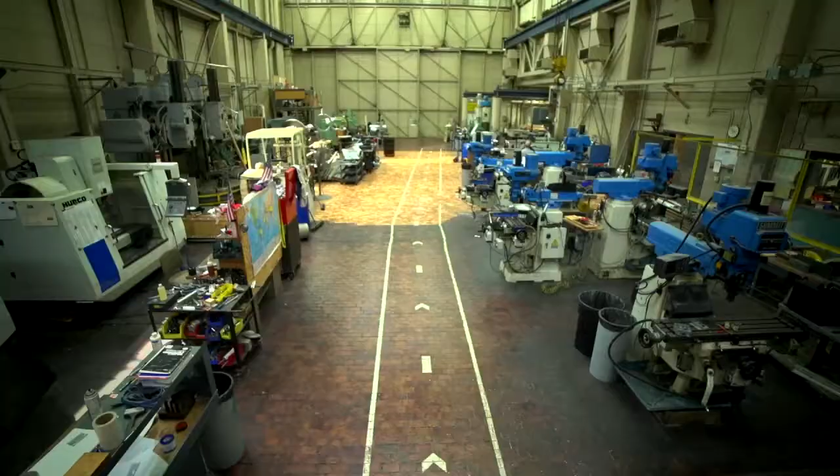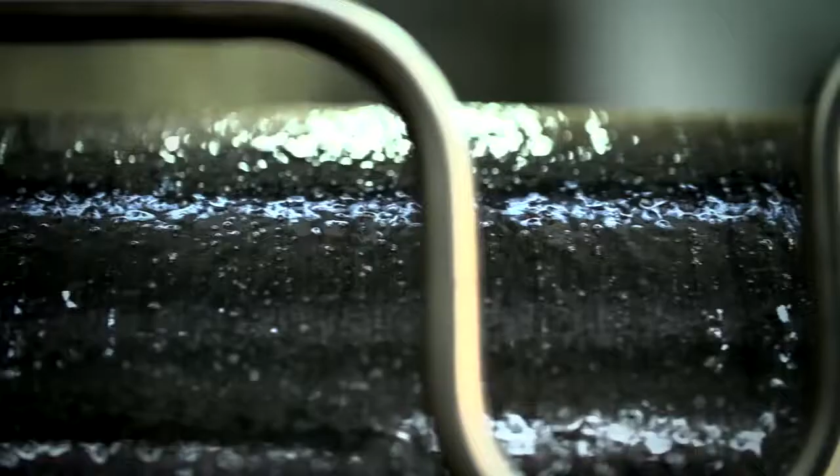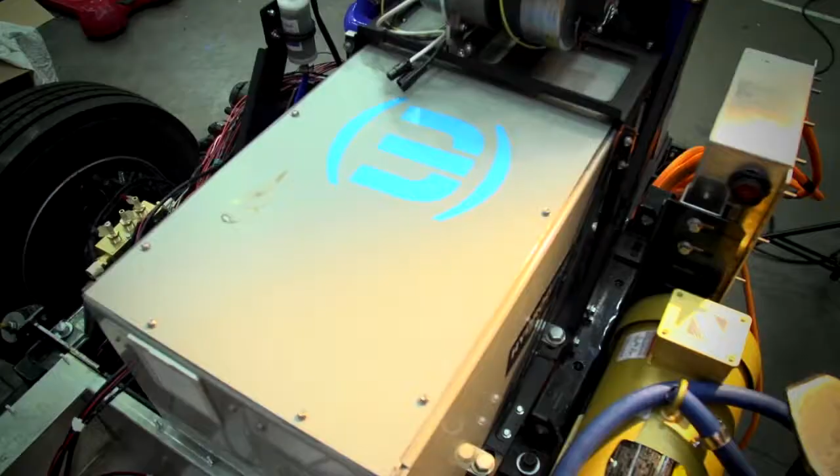On this episode of Game Changers, we will introduce you to the Center for Electromechanics. The CEM is utilizing an investment from the Department of Energy to develop a zero-emission fuel cell hybrid electric vehicle. Through a partnership with UPS, the CEM has been chosen to lead the vehicle design and its build through phase 1 of the project. Once complete, the CEM's prototype will lead the way for 16 additional delivery vans to be retrofit with fuel cell hybrid powertrains, which will be tested at distribution facilities across California.

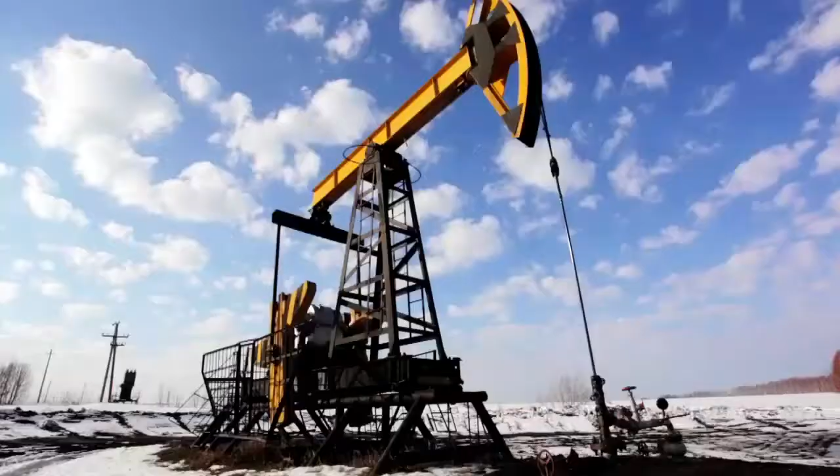We need to wean ourselves from our dependence upon fossil fuels. You just look at your highways, you spew polluting gases. They're causing global warming, they're choking the people in the major cities of the world, and they're not sustainable over the long term. Not only that, but there are a lot of hidden costs with fossil fuels and with the oil that goes to run your car in an internal combustion engine.

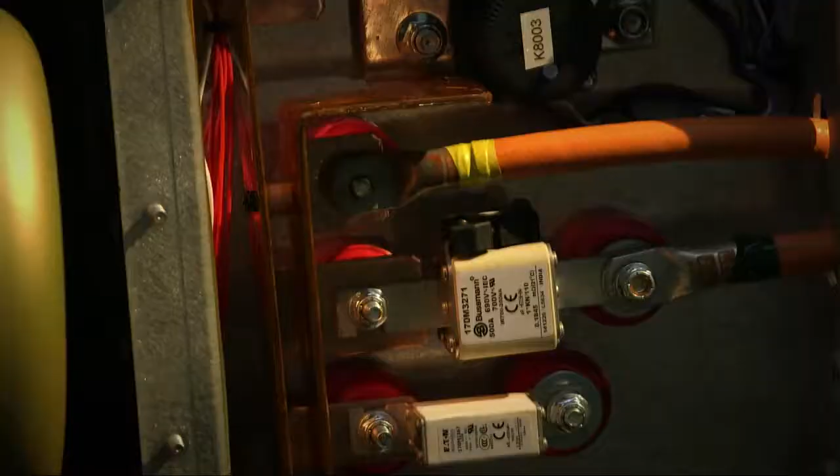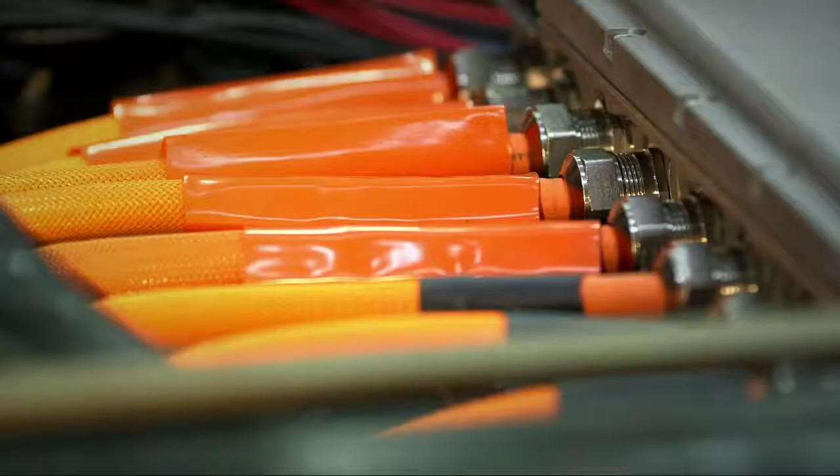We have been working for probably a decade trying to understand how to electrify transportation. We've looked at technologies basically to improve batteries, to improve the vehicles, and now this project, which we're really excited about, is to use hydrogen to augment the battery power.

Think about 2012, the Department of Energy put out a solicitation looking for zero emissions cargo and freight transportation equipment. Think medium-duty size vehicles, class 4 to 7 vehicles. Looking for zero-emission alternatives for those that would extend the range over existing versions of zero-emission vehicles, so that they could complete longer duty cycles and have more commercial viability for the fleet operators.

You get the range that you can get in a typical gasoline-powered vehicle. We can fill it as quickly as you can a typical gasoline-powered vehicle, and we get tremendous performance with no pollution.

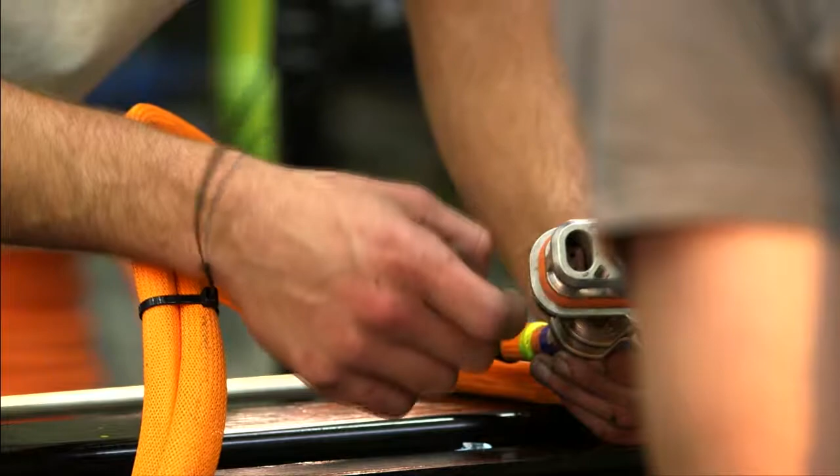Well, funding for the project has actually come from the federal government, the Department of Energy, and from the state of California. And in addition to that, United Parcel Service has worked with us, UPS has worked with us to provide the problem and to provide the constraints. How can the technology actually be used for a company who's in a competitive market trying to make money?

The way to do that and still have a zero emissions vehicle is to outfit it with a hydrogen fuel cell that effectively recharges the batteries while the vehicle's driving down the road and allows you to extend the operating range of the vehicle.

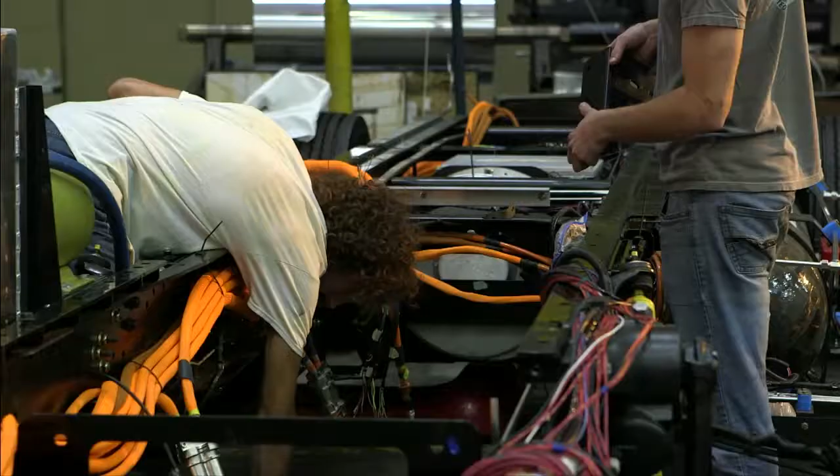We formed the technical team first, then we approached UPS and even FedEx, other folks. I think we first reached out to UPS mainly because the Center for Transportation and the Environment is based in Atlanta, Georgia. UPS has headquarters in Atlanta, so they had some good contacts there.

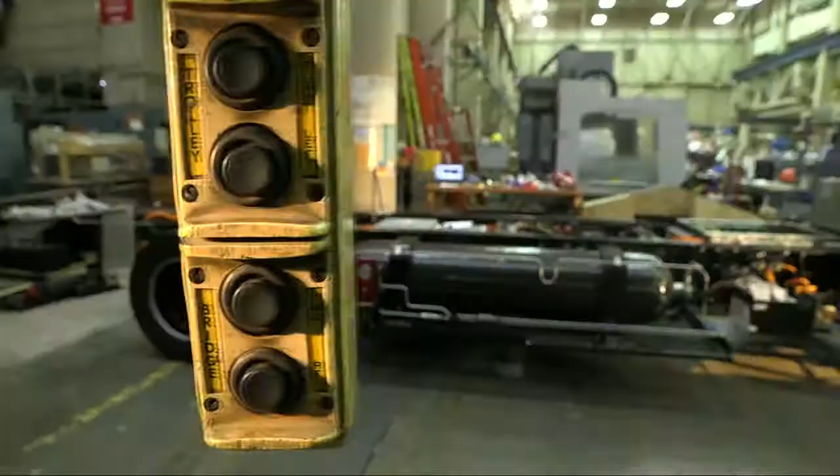As part of the Department of Energy project, they weren't interested in just building a one-off of a vehicle and having a completely research and development project. They were focused on a commercialization project.

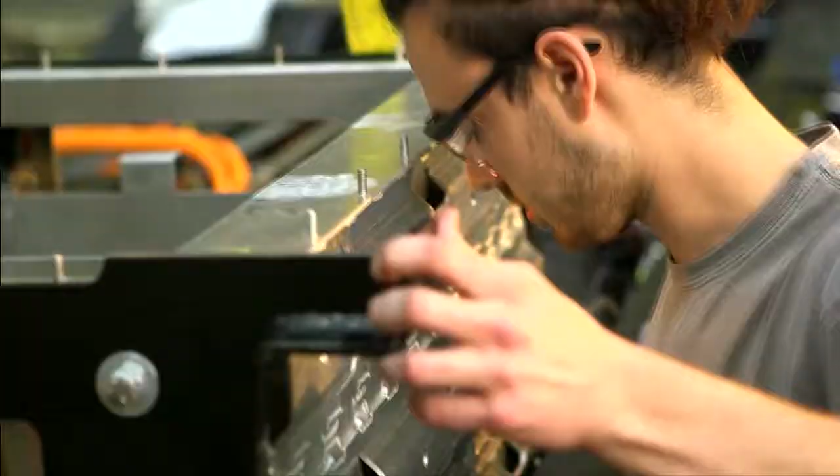More? No, we're good. Give me 2 seconds.

Okay, fuel cell vehicles are, at least for heavy and medium duty vehicles, kind of in their infancy stages. There's not really a commercial product on the market. So the DOE formed up this program. California is investing in it as well to kind of spur the adoption of fuel cell technologies for medium duty trucks and provide a commercial solution for folks such as UPS in the future, so they can go out and procure these vehicles and have that zero emission solution for cargo transportation.

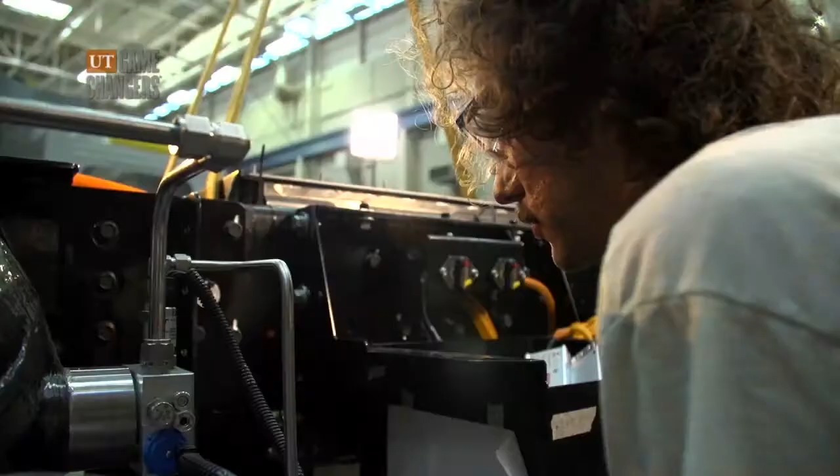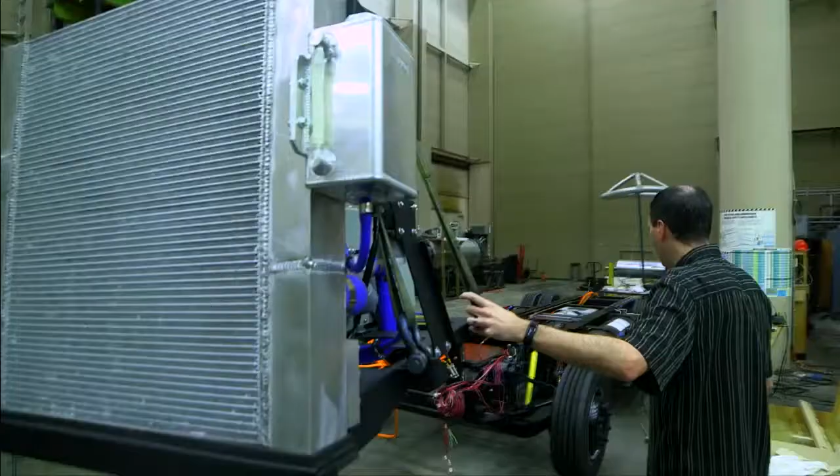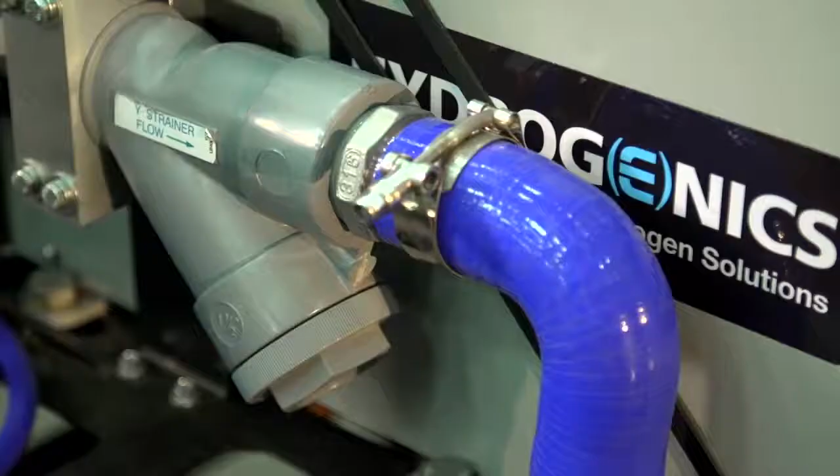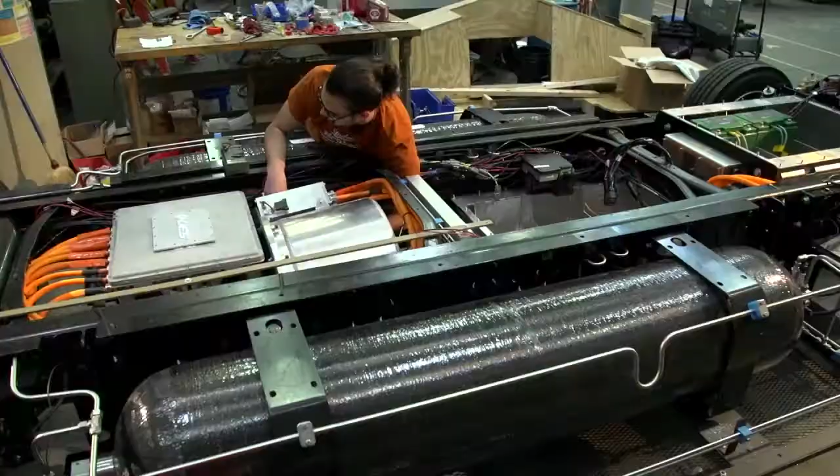A hydrogen fuel cell vehicle, really it's an electric vehicle. So the prime mover, we've replaced the diesel engine in this particular delivery van with an electric motor. The problem is the electric motor is being driven off batteries for energy storage, but that provides, particularly with as large a vehicle as this van, a fairly short drivable range. So the purpose of the hydrogen fuel cell is, in a typical hybrid vehicle, you would still have a small internal combustion engine extending the range of your electric vehicle capability. In this case, we've replaced that internal combustion engine with a hydrogen fuel cell. So now we are using hydrogen, reforming that into electricity to provide additional energy to the batteries, which allows the vehicle to drive much further distances.

Fuel cells have this interesting application that we can use hydrogen for storing our renewable electricity. If we take our excess electricity and make hydrogen, we can then turn the hydrogen around to make electricity, or we can take the hydrogen and use it for fuel. In either case, when we burn the hydrogen, what we're producing is pure water. So we have something that doesn't pollute, something that can strengthen the grid, and something that can drive your car. If we can make that work, it makes a huge difference. And in addition, we already are piping hydrogen around to petrochemical plants because we use hydrogen to make stuff. Chemical engineers take molecules apart, stick hydrogen in the right places, and suddenly you have Tide detergent or nylon or any of the other stuff that you need. So it's putting this hydrogen together in a lot of places. The trick is to be able to make it cheaply enough, and this could be a big difference over the next century.

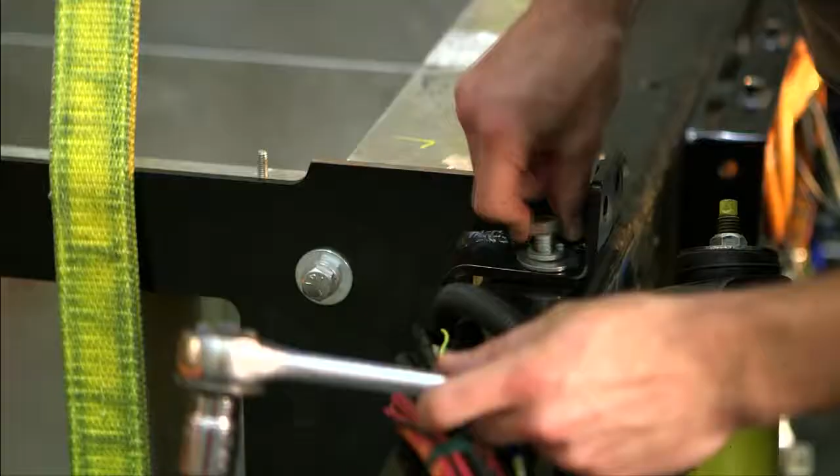Fundamentally, the difference between an electric vehicle versus a hydrogen fuel cell vehicle - people tend to like to pit the two against one another, but at the end of the day, a fuel cell vehicle is still an electric vehicle. It just has a fuel cell package added to that electric vehicle, and that fuel cell is able to convert hydrogen into electricity and really store a lot more energy on the vehicle in a smaller package.

Fuel cells were used by the Apollo spacecraft to provide electricity when we put a man on the moon. It takes hydrogen into a fuel cell and then generates electricity. The advantage with fuel cell vehicles is they have very fast refilling times. A fuel cell vehicle like the one my colleagues are working on is innovative not only for potentially reducing costs, but reducing emissions.

When you use a battery, you reduce the pollution, right? So that is the major impact you will have, reducing the pollution. As well as when you use batteries, you can produce electricity from other means, and then you can store it and use it rather than burning the fuel and polluting the atmosphere.

Hydrogen is the most plentiful element on the earth, and so if we are able to take that and the energy stored in it and use it for transportation, which is one of our largest energy sectors, then that's a phenomenal goal to strive for. It'd be absolutely amazing if we can do it and get further away from fossil fuels.

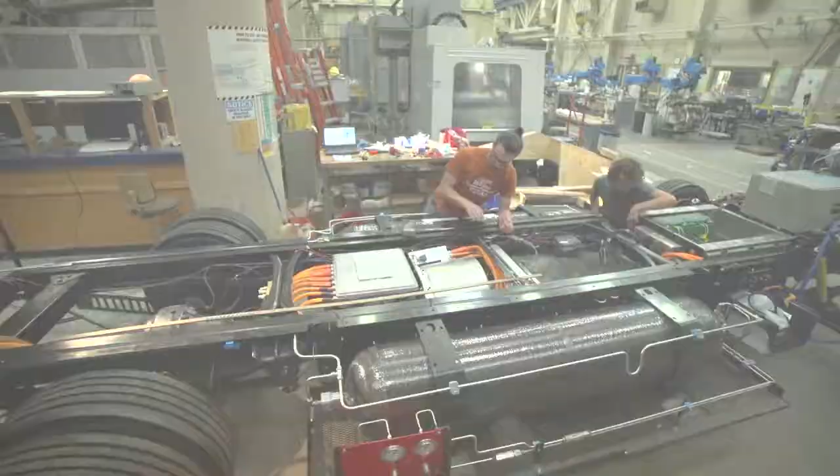When we return to Game Changers, we'll take a closer look at the vehicle's fuel cell as well as the lithium-ion battery and its impact not only on vehicles, but on the future of transportation.

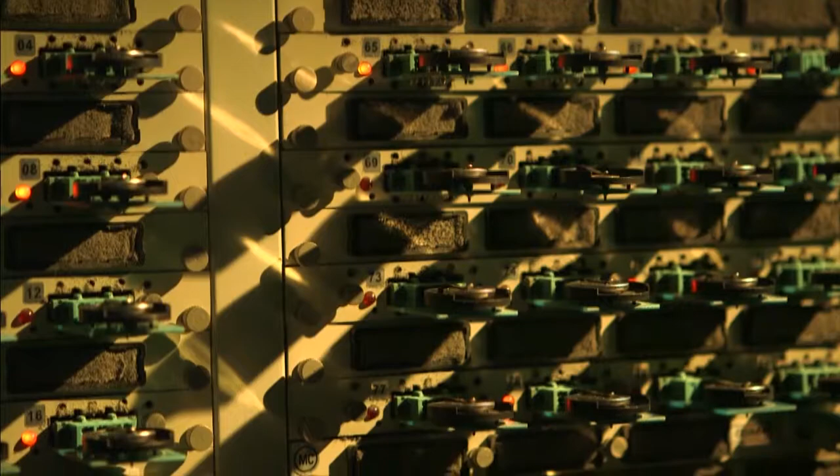You will see a lot of electric vehicles. That means the transportation sector will be electrified all over the world as we move along. So that is going to happen. We already see electric vehicles. The technologies that spilled over that made electric vehicles viable now, where they haven't been for 100 years - you look at that was lithium batteries from consumer electronics, and that was power electronics controlling the electric motors from the computer industry.

John Goodenough is a professor at the University of Texas in Austin. He is credited with being the founder and developer, kind of the father of lithium-ion battery technologies. He developed this lithium-ion battery a couple of decades ago. The batteries that are on this fuel cell delivery van for UPS are actually from a company that licensed the technology developed by Dr. Goodenough here at the University of Texas. So those are lithium iron phosphate batteries.

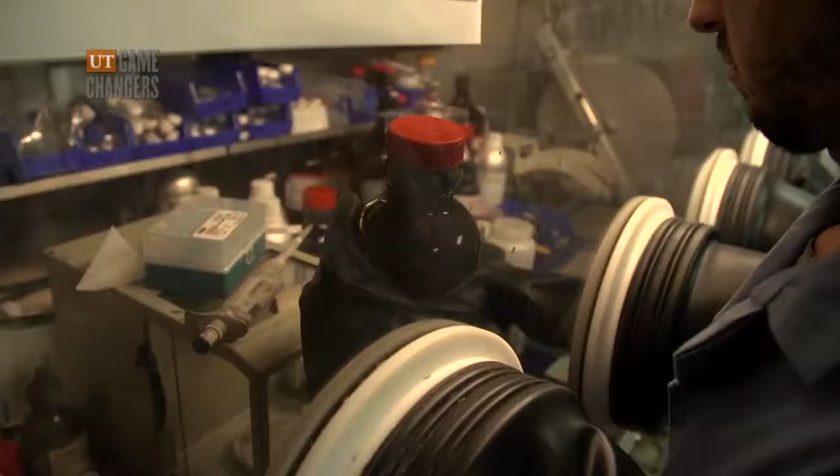So you have to find a way to make a battery that is safe, a battery that is competitive in cost with the internal combustion engine you have today, a battery which has the energy density that allows you to have a large charging range. So those are fundamental things you have to figure out how to do by getting the right materials in your battery.

If you can get a battery that will do it, there's going to be not only trucks and buses and cars, but they're already thinking, what about airplanes? What about boats? What about drones? All kinds of things. So once you can make a better battery, you'll be surprised how many things it can do.

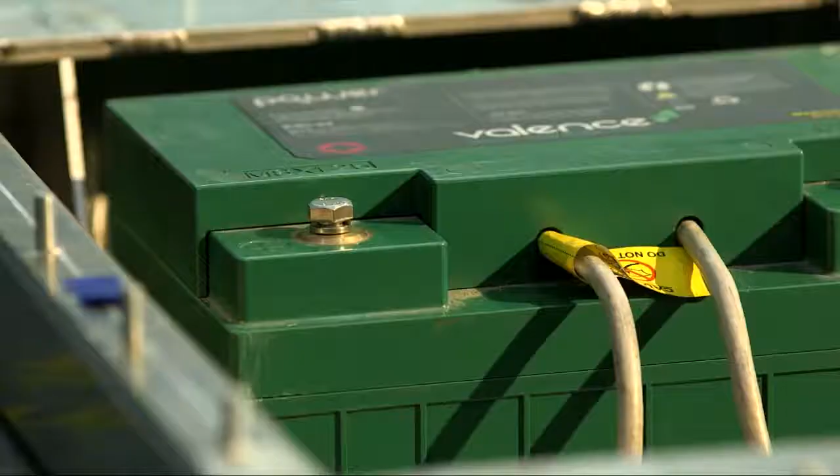Fundamentally, a fuel cell vehicle is an electric vehicle. It's still driven by an electric motor, still has battery packs on it. But there's a fuel cell system included that extends the range of those batteries. You could think of it, at least how this vehicle is designed, as an onboard battery charger. So it uses hydrogen to recharge the batteries during operation.

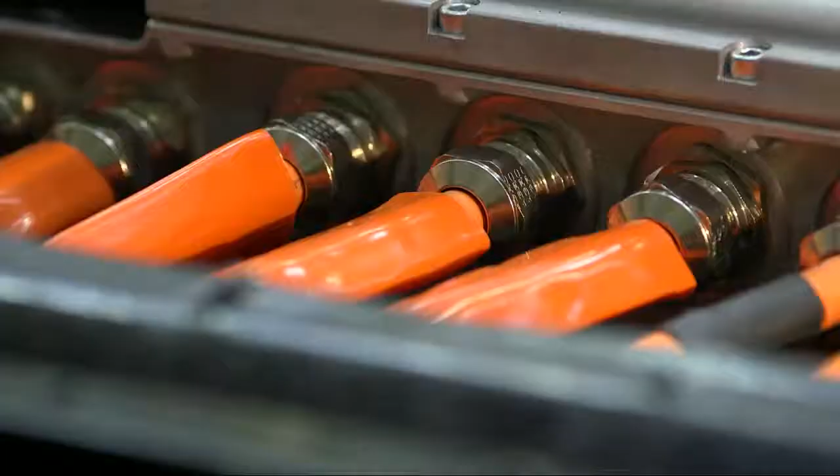It is solely converting hydrogen into electricity. So one of the major advantages, the only byproduct, is water. You have air and the hydrogen mixed through the membranes, and you're extracting the electrons, which is what electricity is. That electricity is being stored into the batteries. The byproduct is water instead of all those nasty diesel exhaust gases that you hear about all over the news. And at that point, the vehicle is able to use the electricity from the batteries to power the DC motor, which directly drives your rear axle.

The biggest challenge in the project is really designing a vehicle that meets the range and duty cycles that UPS is operating these vehicles on.

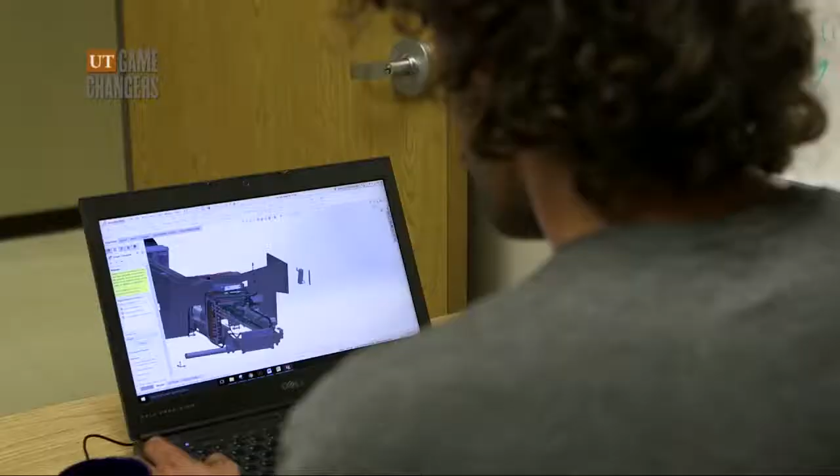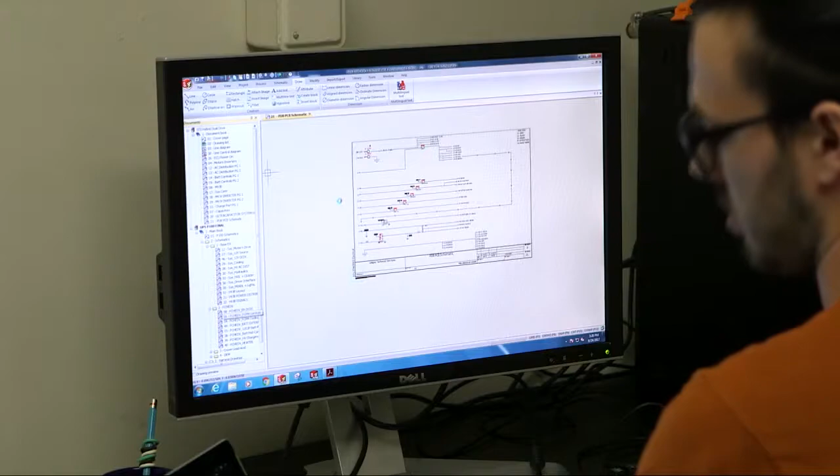Here at the Center for Electromechanics, we did a lot of vehicle powertrain modeling and computer simulations of the vehicle, collected a lot of duty cycle and route data with UPS early on in the project to study and determine the right size battery pack, the right size motor, the right size fuel cell, how much hydrogen storage you had on there. Really optimize the entire system of the vehicle without necessarily over-designing any one component. You have to balance the cost and performance of each component and the entire vehicle, all the systems together.

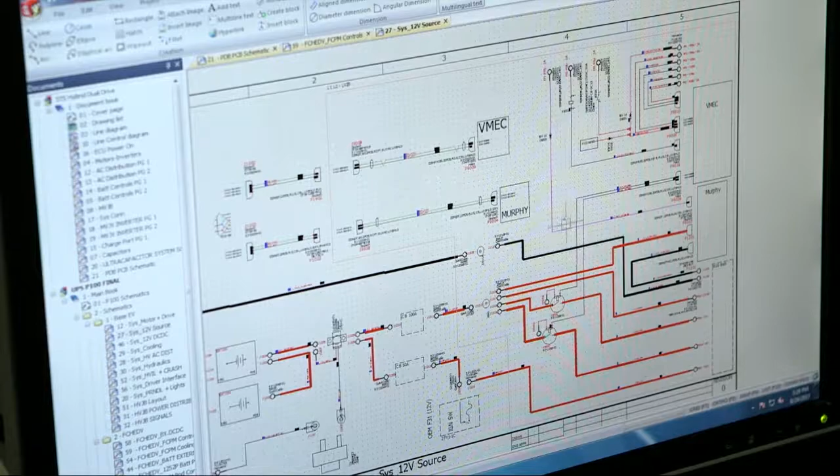The electric motor is directly driving the rear axles, which means we don't have a transmission. So all of the mechanical losses in transporting that energy, the rotational energy from the prime mover, from your engine, through the transmission to the rear axle, you get to eliminate those losses as well. So a huge part of this project early on was sizing that motor and making sure that it had the power and the torque capability to propel this vehicle down the road when it is fully loaded.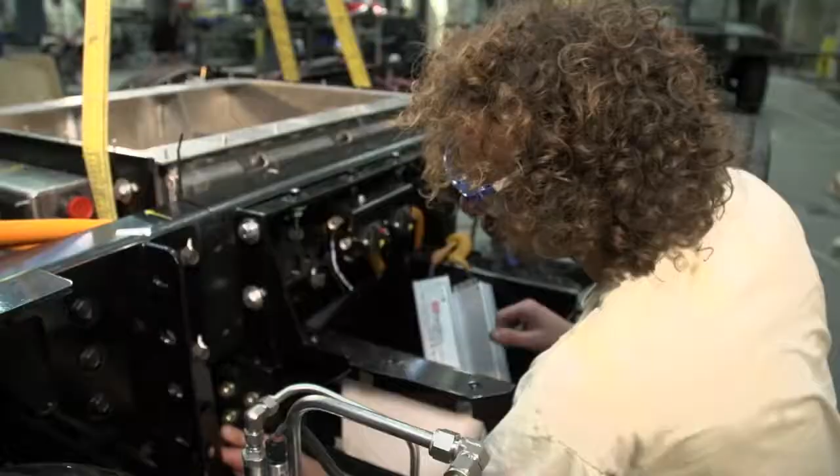When it comes to the power of, in this case, an electric vehicle, I would actually say it is far superior to its diesel counterpart. Do you feel like you go up and go down?

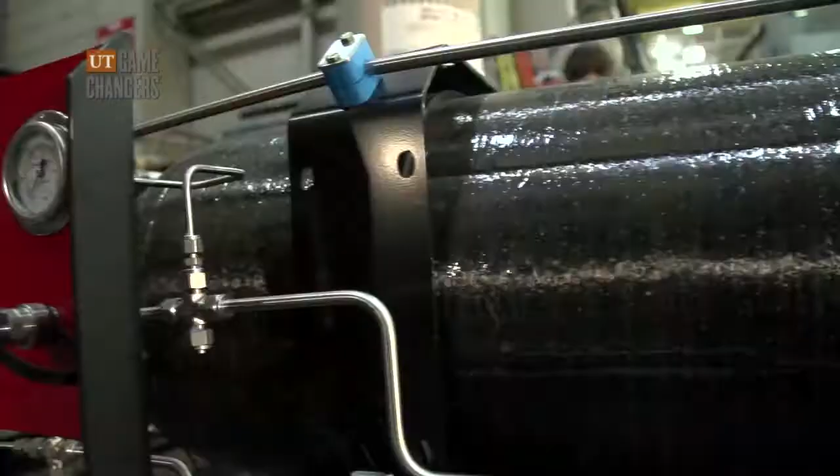The fundamental challenge for a hydrogen fuel cell vehicle is really hydrogen. It's not a dense molecule. It's the lightest molecule out there, and it's hard to store a lot of hydrogen, a lot of energy in hydrogen, in a small package. It's why we have to compress it to 5,000, 10,000 PSI, put it in high pressure cylinders on the vehicles. So we do have to compress the hydrogen to increase its energy storage for vehicular applications.

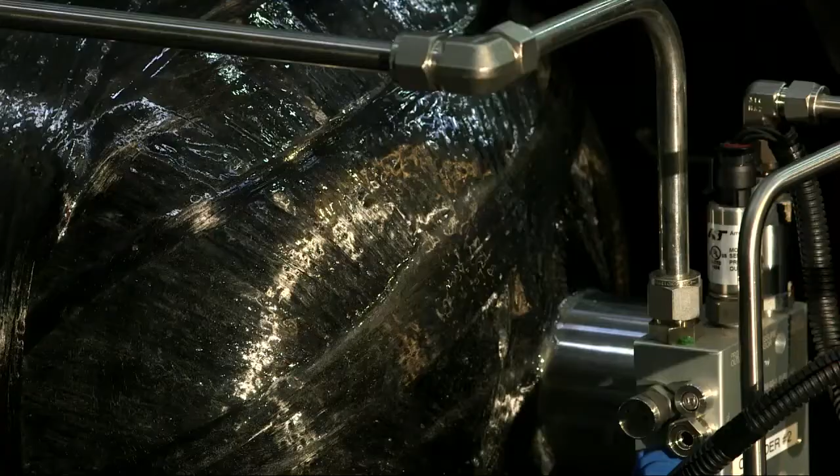When it comes to hydrogen gas, yes, there are many precautions that we have to take into account that you don't necessarily have to factor in when it comes to a diesel or a gasoline-powered engine. Specifically, the biggest concern is the tanks themselves that are storing the hydrogen. These tanks have gone through rigorous testing, everything from being shot with a bullet to being thrown into a bonfire to be burned. And these are composite tanks, and they are made specifically to withstand the pressures of the hydrogen gas that are being filled within it. And then, of course, we have a whole multitude of fail-safes designed throughout the system.

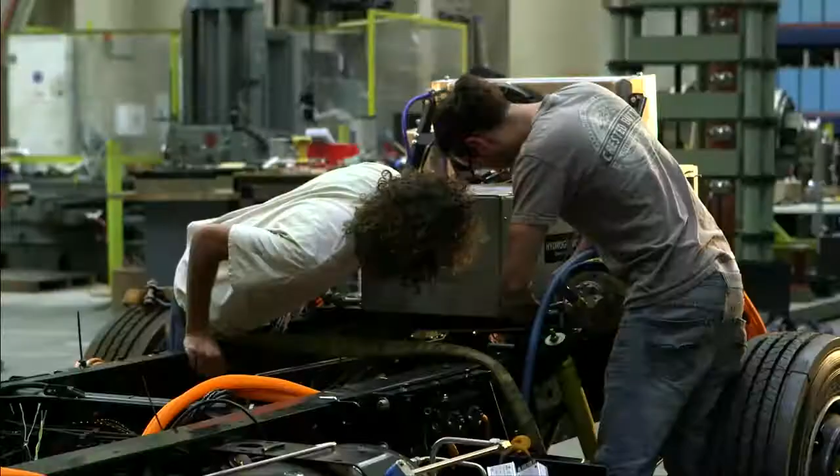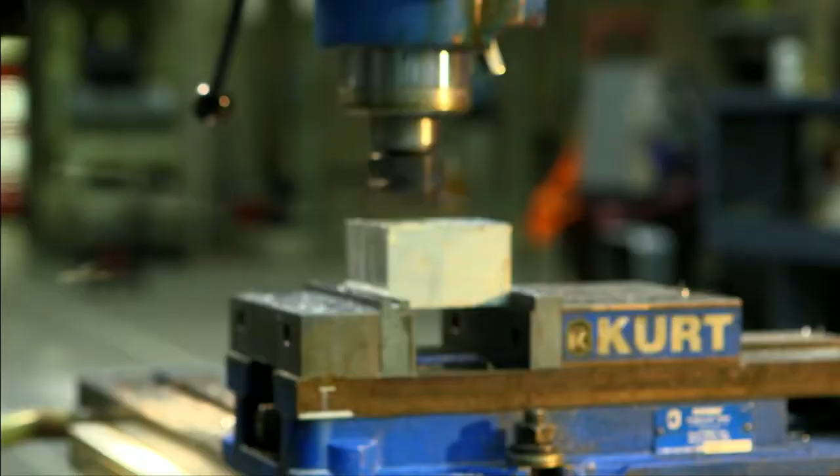Being a student coming in and working here at the Center for Electromechanics and getting to work on such a large-scale project, essentially taking a diesel engine vehicle, stripping it down to the bare chassis, removing the engine, all the oils, cleaning it up, and then rebuilding it as a zero-emission fuel cell vehicle. That's definitely a very rare opportunity that most students will not have during their education.

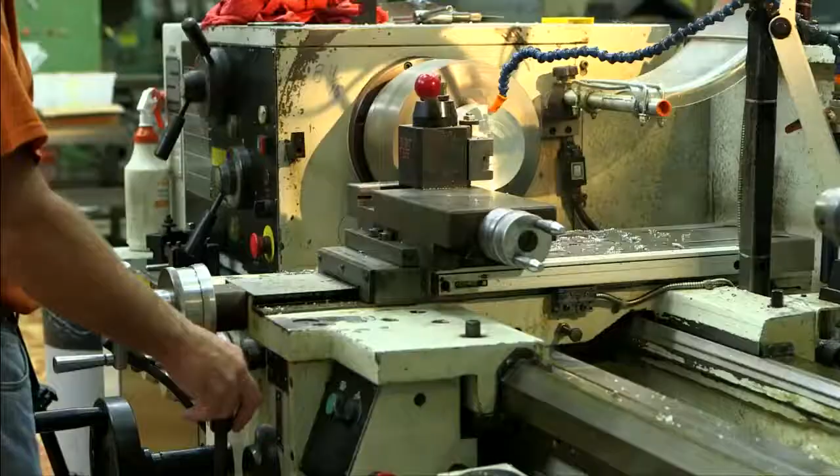We design the vehicle and then we get parts in, but along the way, sometimes maybe we thought this component we were gonna get, but then that component didn't actually come through. So we have to make some modifications to maybe a bracket or where something's gonna live. And to be in a facility like CEM, we have access to end mills and lathes and all the working equipment we need to make these modifications right here at the shop with a quick turnover and continue on the project.

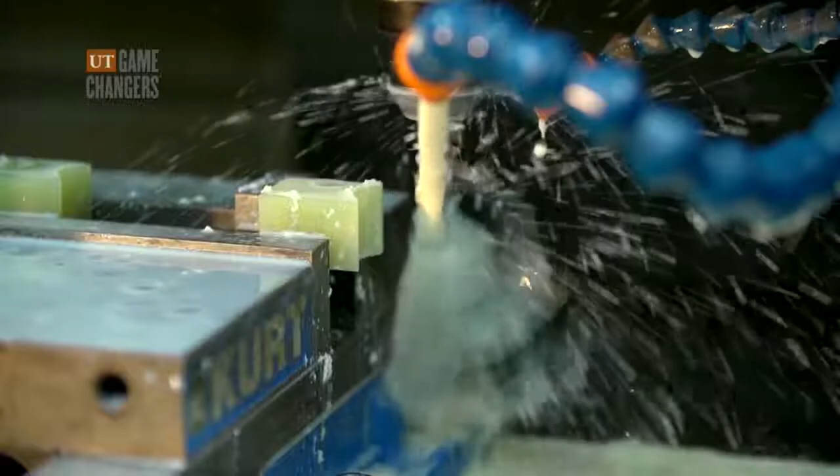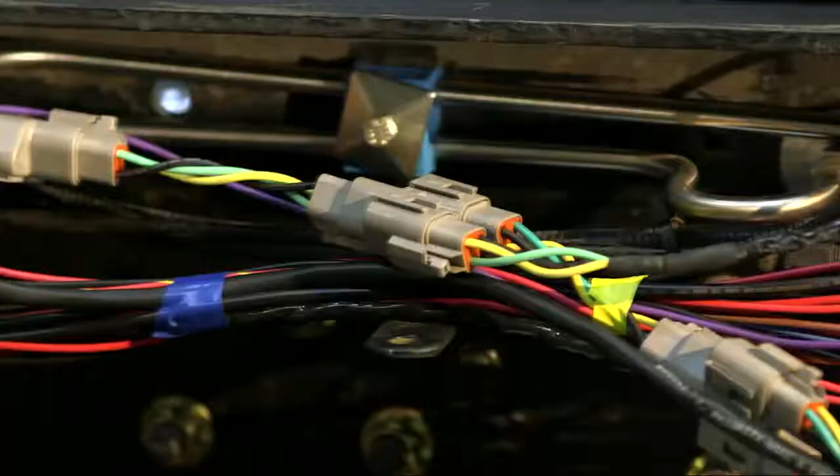Most of the design process was handled by the engineers, whether here at the university or with our electric vehicle integrator partner. But the students did have some involvement there. They did a lot of the solid modeling and helped in the layout of the vehicle. They were actually responsible for mapping out a lot of the dimensions of the vehicle. We didn't have a solid model of the chassis. They had to actually come out here, take a lot of physical dimensions and create that on their own.

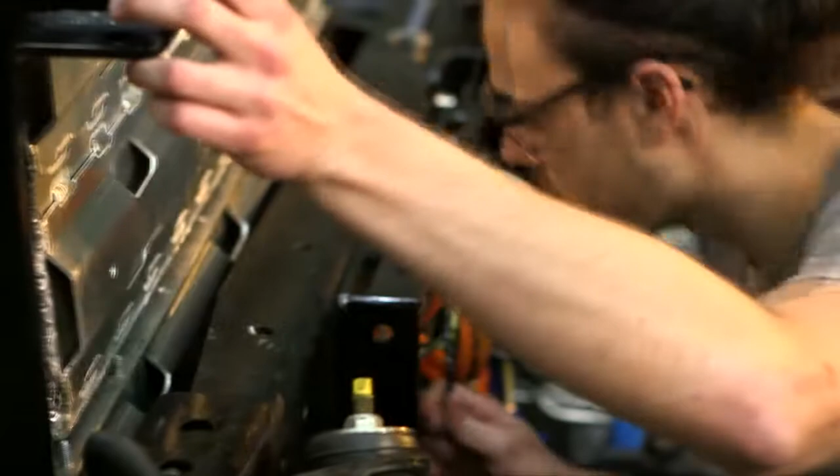In school, we learn about circuit breakers, fuses, motors, but I don't think I've ever actually worked with an actual fuse with my hands. I know the theory behind it, but I've never actually wired it or worked with it. I think here at CEM, they've given me the chance to actually wire stuff up and just have a new experience, some experience that people don't have.

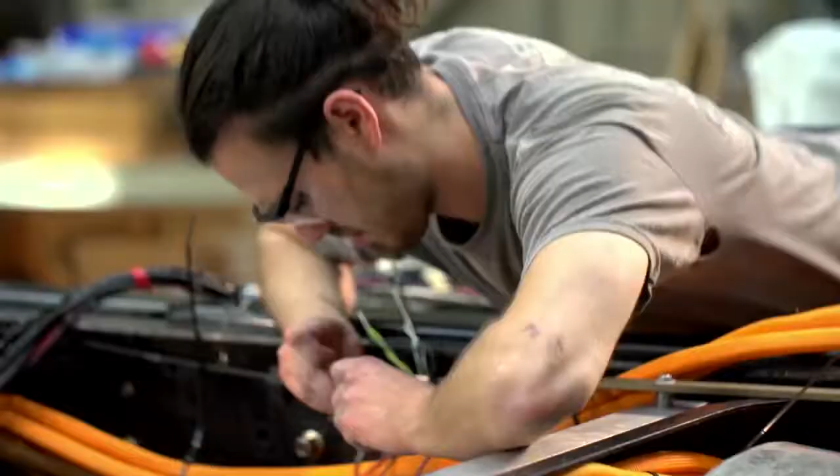This allows a student to come in and be part of a design of a vehicle, build a vehicle, and test drive a vehicle all in a student's career. That's an awesome educational experience. And besides that, the vehicle he's putting out is one that's never been built by anybody anywhere.

There's nothing like real live hands-on experience to gain some expertise. And it's not only good for resume enhancement, it's good for working knowledge to help out and understand what to go learn further. So once you get a base from some hands-on, all of a sudden some of the theoretical becomes more relevant and more interesting. So then you can ratchet up the knowledge, ratchet up the exploration, ratchet up the excitement from students in learning more.

When we return to Game Changers, we'll take a look at the support provided from the university, along with the cross-campus collaboration that has helped bring this project to life.

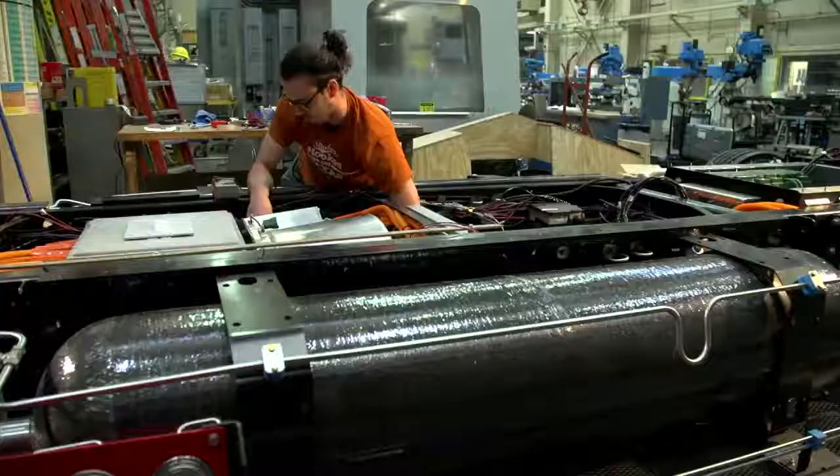We're very hopeful that the combination of batteries and fuel cells is going to be the key that breaks open electrification of vehicle transportation. I think the future of fuel cell vehicles is very promising. There's a lot of debate in the news and media right now, but your auto manufacturers, your Toyotas, Hondas, GMs, they're pretty much all in on hydrogen fuel cell vehicles.

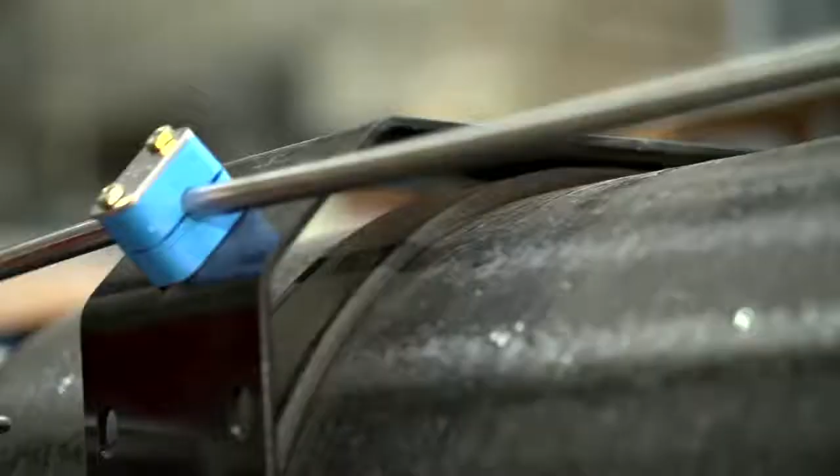And probably the next challenge then is really just the cost of all the equipment and systems, right? That's sort of the next challenge for fuel cell vehicles. The tanks are relatively expensive. The fuel cell components are relatively expensive right now, but a lot of work's been going on. The fuel cell prices keep dropping and dropping. There's still plenty more headroom to bring those prices down so that they are commercially viable.

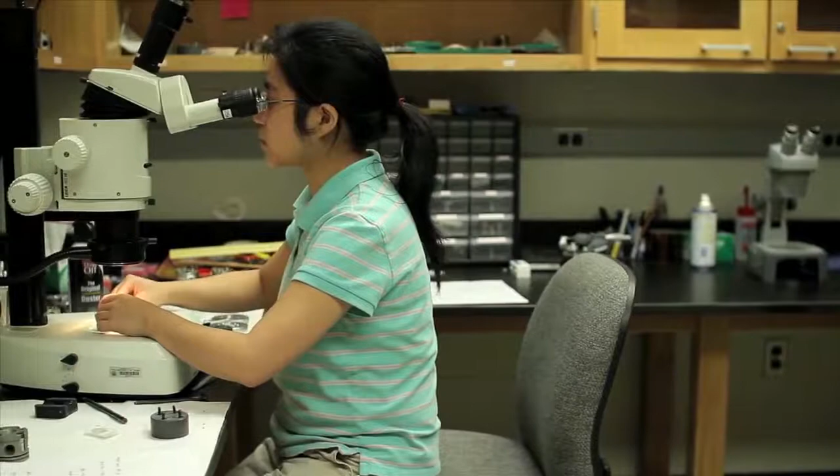We do work closely with the rest of the university throughout our various programs and projects. We can work with natural sciences, the College of Engineering, business school, even petroleum engineering department and geophysics. We've done some work with those guys, partnering with them in the past.

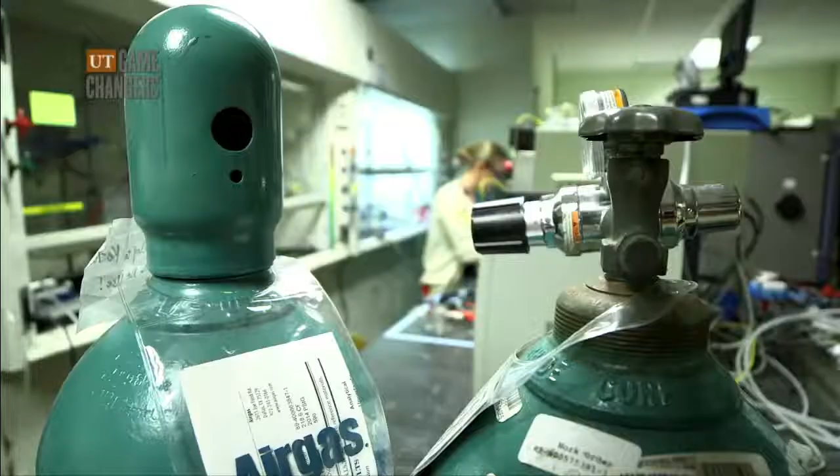The myth of a single brilliant scientist sitting in a small laboratory with a eureka moment is a myth. And it's so appealing but it almost never happens. What really happens is you get a lot of smart people who know a lot of the right stuff together on a team that's highly productive, and you get things that really matter.

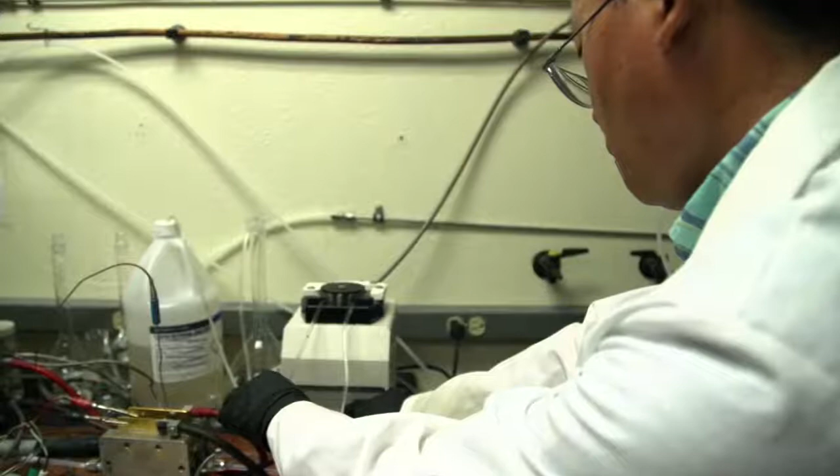There's part of the electrical engineering department there. There's the Center for Electromechanics. You'll see expertise being tapped in electrochemical expertise, for example, the battery or fuel cell developers. Controls, system theory. So those types of cross-disciplinary expertises that don't necessarily fit perfectly in a silo are important to bring together, and that's what these projects and our efforts tend to do.

The administration of the university really likes the idea that we found a way of making a difference by expanding our research, involving the students in the research, giving them practical experience. It's just a win-win-win.

The support from the university for the project really comes in many forms and factors. One is that they're providing the facilities here that we work with. We're an organized research unit within UT Austin, which means we go after DOE proposal opportunities, DOD, other states, or work with private industry to bring in sponsored research projects. So we're funded from outside sources outside the university, but a lot of what we do, we cannot do without the facilities the university has provided.

We're also under the Cockrell School of Engineering on campus, and there we get full access to the engineering school and their professors and students. If we're working on a technology that's outside our expertise, we have a wealth of knowledge on campus in the form of professors throughout all the colleges, not just engineering school.

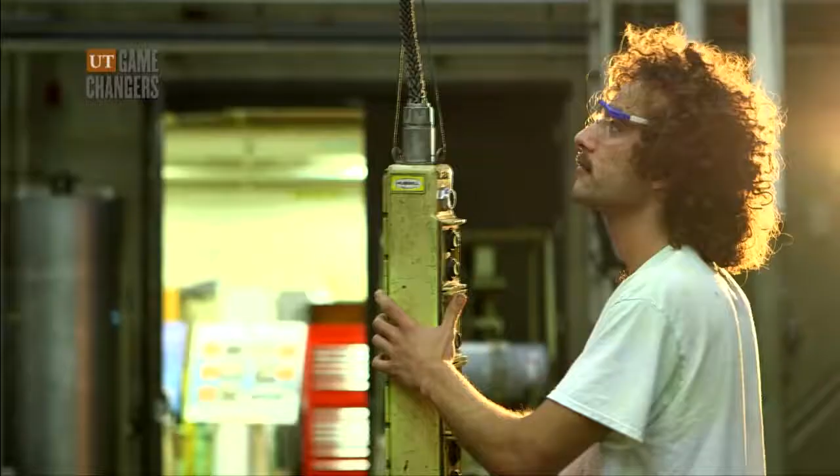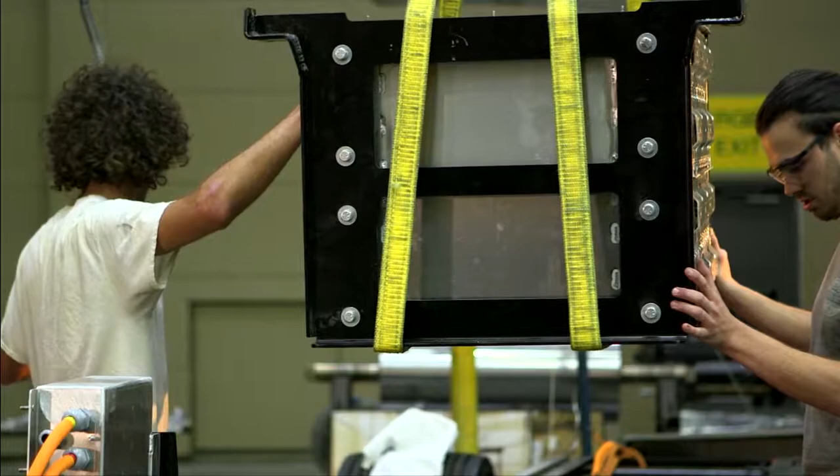For the University of Texas, it's really just one in 1,000 things that we do that makes the world better. I think we're part of a really impressive university that is putting out things from autonomous vehicles to better streets, better traffic controls, cybersecurity so people can't hack into your car—the whole range of things around transportation. We're just part of that whole activity at UT that's going to make our next generation transportation better, cheaper and faster than our last one.

At the Center for Electromechanics, we're able to work closely and provide a link between the academic side of the university and outside industry, and really work to bring teams together and try to get new technologies out into the marketplace.

I think it's a game changer because we have so many wonderful people that are brilliant, like Dr. Goodenough and Dr. Manthiram, doing leading edge research in batteries, for example—pioneers who years ago set the stage for a lot of these developments. The interesting thing is, at 95 years of age, he's not stopping. He's just as enthusiastic and has as many brilliant ideas today as he had back then.

The University of Texas would be proud to have supported the research that gave rise to a game changer as far as the whole society is concerned. If you can get an all-electric car that will be taken over by society and help wean us from the dependence upon fossil fuels, the University of Texas can be very proud of what it's been able to do. Because of the strong expertise we have in both materials and electrochemistry, UT is in a good position to discover game-changing materials and battery technologies as we go along.

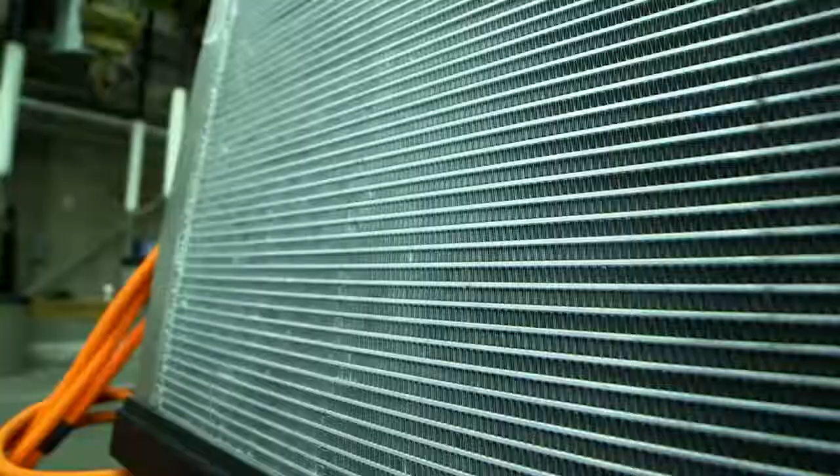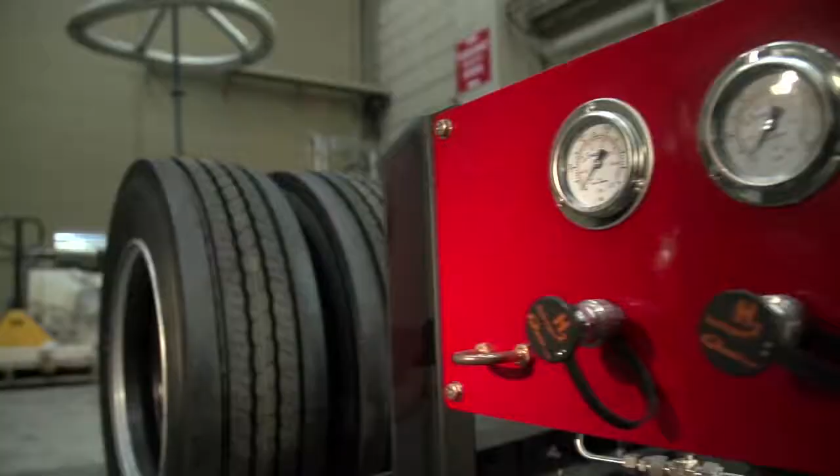The Hydrogen Fuel Cell Project is a game changer for the University of Texas because we are on the forefront of working on a project that could potentially change the way we transport goods and services and people in the coming years—not only changing the way we transport them, but also doing so with significantly less impact when it comes to greenhouse gases and emissions from the byproducts of the fuel we're consuming to propel those vehicles.

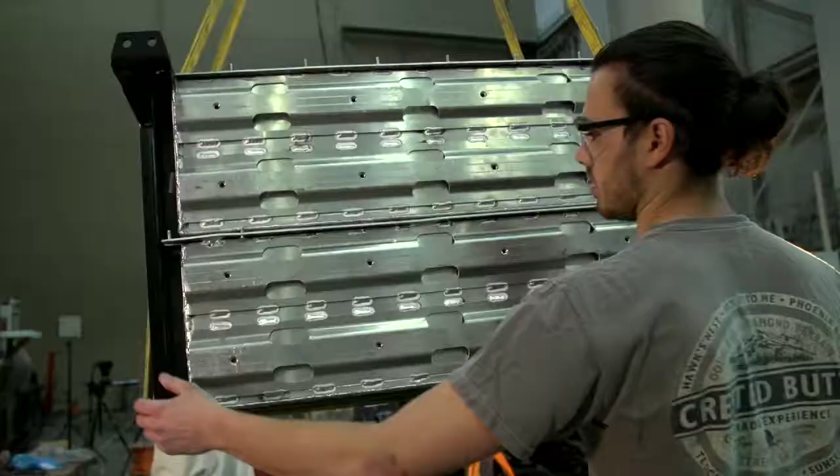It's a game changer in the sense that we are advancing fuel cell vehicle technologies for medium and heavy duty vehicles. Your automotive companies—Toyotas, Hondas, GMs, you name it—are doing research for light duty passenger vehicles right now, and they're leading the way there. But in the medium and heavy duty marketplace, there's nobody really taking on that development aspect and trying to commercialize those vehicles, and with this project, we're looking to do that.

We're looking to get this technology out of the laboratory, out of the prototype development phase, and make a product—transition it into industry and have somebody else run with it after we're done developing the very first vehicle here at UT. But really change the marketplace and provide a solution for customers and fleet operators such as UPS.